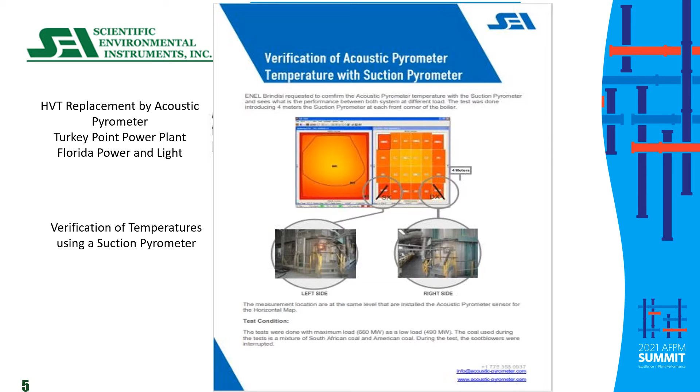One of our most important installations is at PDVSA, where with Rockwell control logic, we actually control the fuel coming into the refinery heater.

This is very important because in order to maintain high efficiencies, you must be able to control all the variables, like the stack damper and ambient air, which affects the combustion.

At the same time, we split the information from the gas temperature and supply it to the Rockwell PLC so that it can actually monitor and control the fuel injection to the burners.

This was done in the late 2007-2009 period at the Cardón refinery in Venezuela.

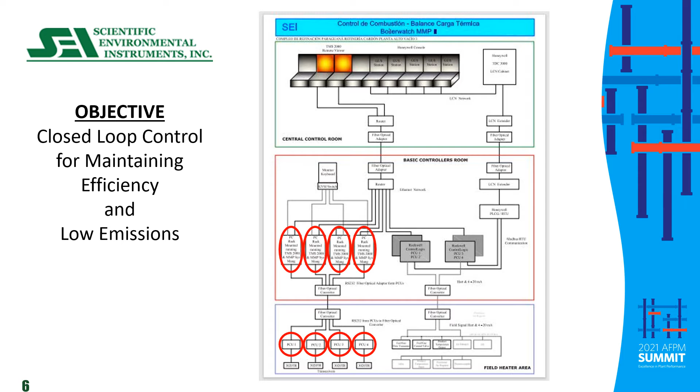In this slide, please read so that our technology can be better understood.

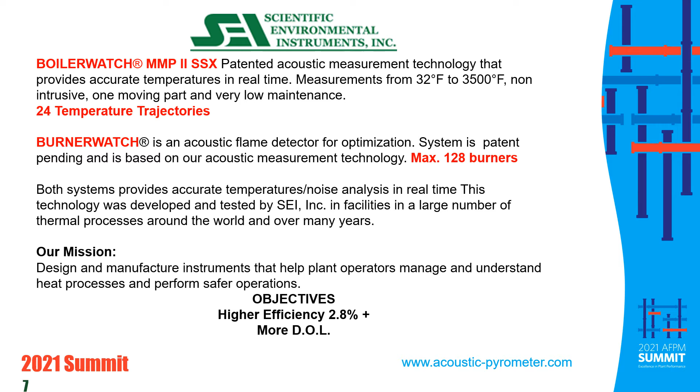Item number 2, the PCU, controls the air valve, which is the only moving part, supplies AC or DC volts for the valve, and 24 volts to the preamplifier.

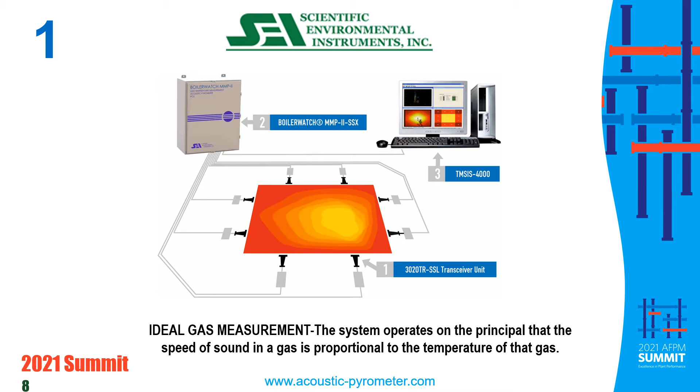It calculates the temperature. The mapping computer today can export to smartphones and big screens.

With the known path length, true gas temperature can be calculated. Note that the paths cover the furnace with temperature lines with many intersections for a realistic two-dimensional temperature depiction. Wall temperatures are provided with our software.

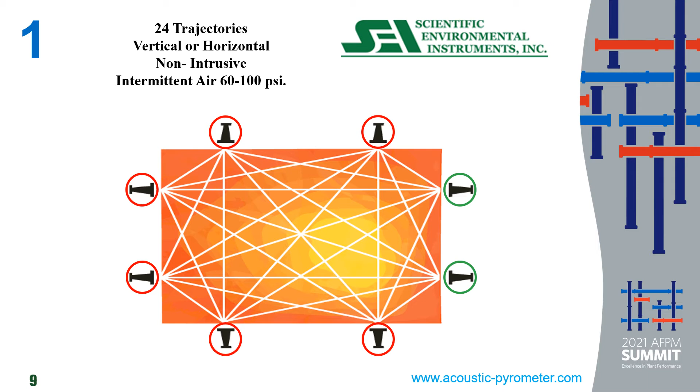For verification of temperatures, we use an HVT, the only way to be assured of correct temperatures.

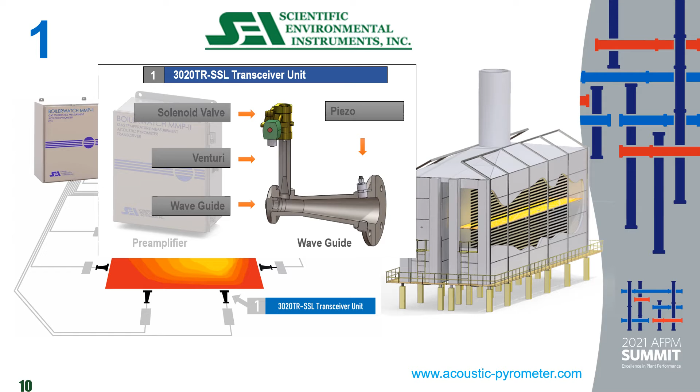Sound is deflected at 90 degrees. The microphone detects the sound signal and sets the time as T0 for the transmitter. As soon as the sound is detected by the receiver, at T1, we calculate the time en route.

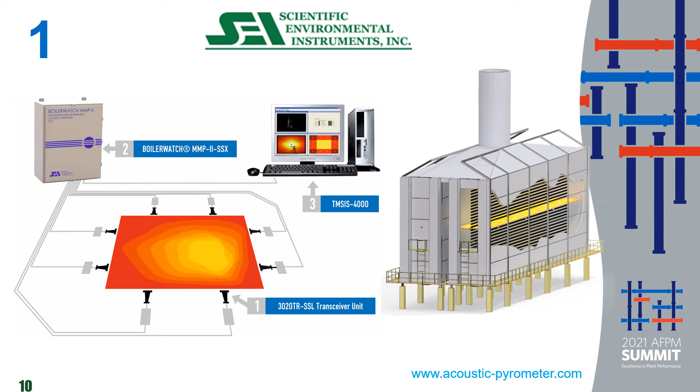We calculate the temperatures using the ideal gas law. Very simple, non-contact, and low maintenance.

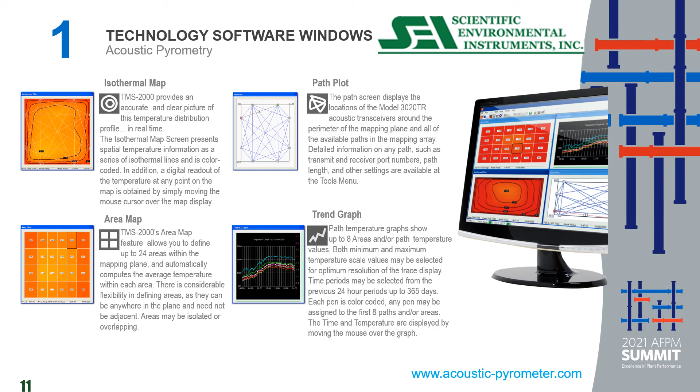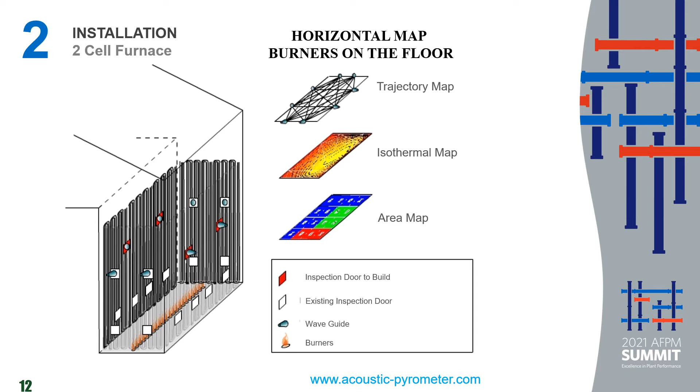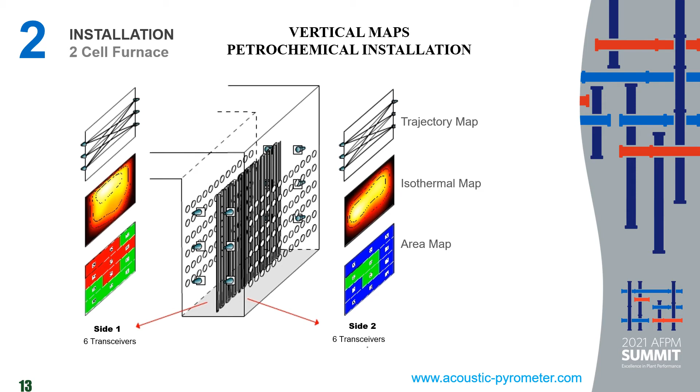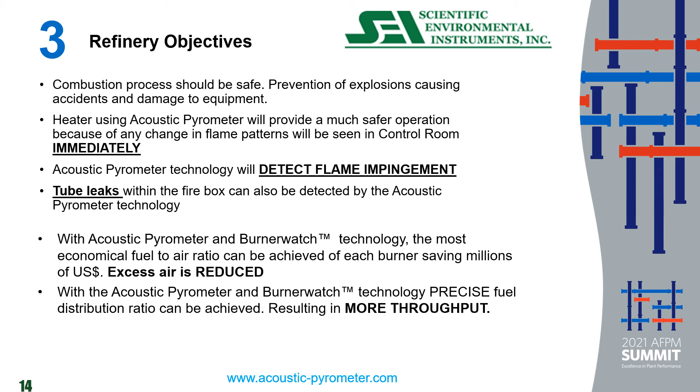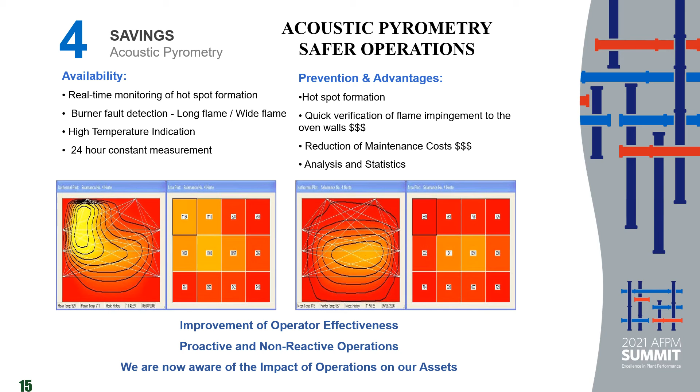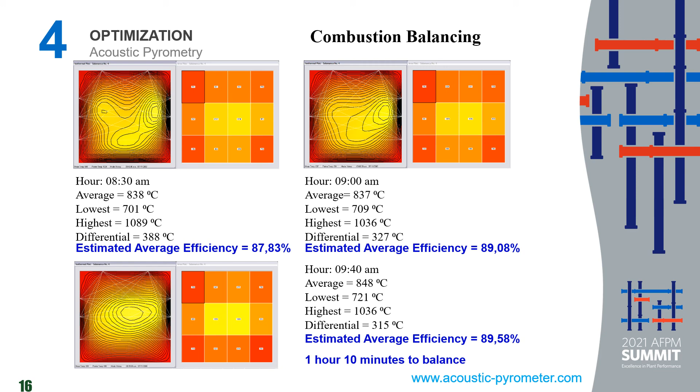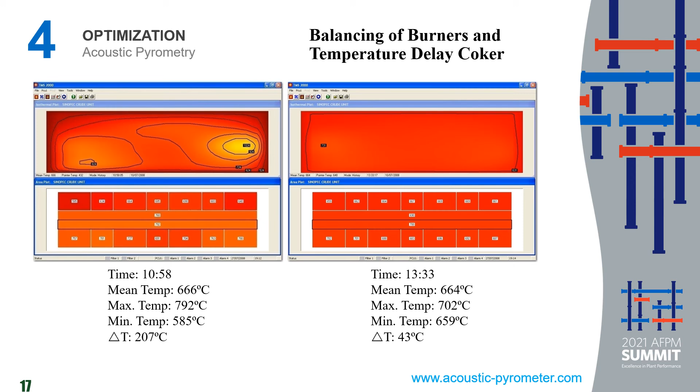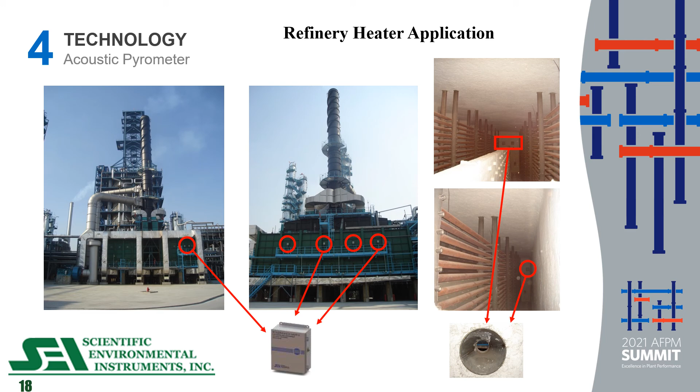This report, The Sound of Temperature 2002, created by the student Mr. Jesus M. Duarte for Fontys Hogeschool Applied Sciences in Holland for the engineering department. He was assigned the study of the acoustic pyrometer that was installed in the refinery of PDVSA Shell.